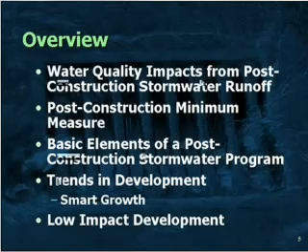Then we're going to move into two new areas. We'll talk about trends in development, the big picture, and Jeff Anderson will speak about EPA's smart growth initiatives. Then we'll connect that to another interesting topic: low impact development.

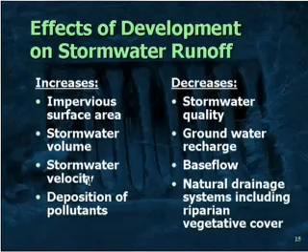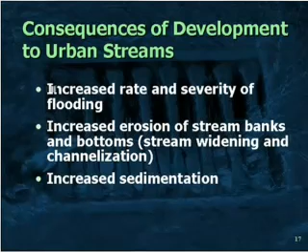Of course, we're seeing increases in flooding in particular areas, and we need to keep track of that. We're making changes in the hydrology—are we causing more expenses in trying to deal with flooding? Also, increased erosion of stream banks, channelization, and increased sedimentation.

And finally, of course, as we've mentioned, the chemical pollution issues, changes in biological populations—particularly the larger fish species such as trout and salmon are being affected. And all of these things are linked together.

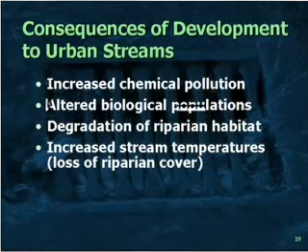Also of interest is temperature, as we change the physical characteristics of the areas around our streams and lakes. We're changing temperatures, and temperature can have a vast effect on the fish species and invertebrates in a particular stream. Actually, temperature is listed as a pollutant within the Clean Water Act as well, so eventually we may have specific requirements for temperature as a pollutant.

I think we've covered many of these things already, but these are the common pollutants we see in urban stormwater—obviously sediment and nutrients being the top two, and you can see a variety of other things. One acronym some of you may not know is the last one: polyaromatic hydrocarbons.

Typically in an urban area, these PAHs are coming off of parking lots. They dissolve in water, and particularly when a parking lot is resealed, we're finding heavy loads of these water-soluble pollutants coming off these parking lots, and they're very toxic to fish and other wildlife.

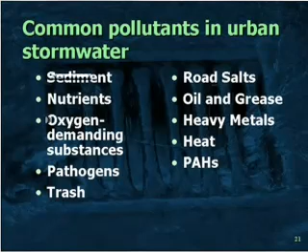There's an interesting new study out from the U.S. Geological Survey, which is noted on our website. So if you want to know more about this particular issue, there's quite a bit more to find out.

The next slide has some pictures. We're talking about sediment being dumped out, as noted on the left, when a stream hits a larger body of water. Algal blooms being caused by excess nutrients on the right, impacts from construction in the middle, and also cold weather events such as snowmelt.

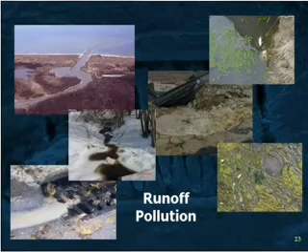Often people don't really think about that, but an awful lot of pollutants build up on the landscape during cold weather, and then when the snow melts and the spring rains come, you'll have particularly high concentrations of pollutants.

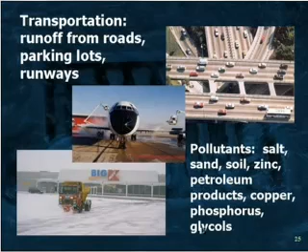Some common sources of pollutants out there come from a lot of our daily activities. Roads and parking lots contribute all sorts of pollutants. And also some of the choices we make as homeowners, such as fertilizing lawns, the herbicides we choose, or the insecticides we choose. All these millions of little choices that everyone makes every day are affecting the quality of stormwater.

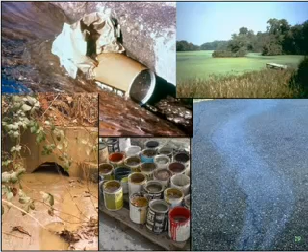Some more pictures here of common problems: trash and debris is a significant problem in many areas, as well as algal blooms, oil from parking lots leaking from cars, various toxic wastes, and of course sediment being the number one pollutant, believe it or not, in the United States.

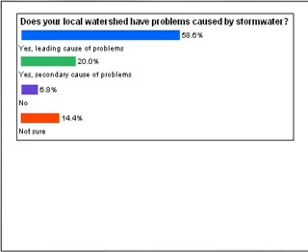So we have another one. If you said yes in the previous question, select as many as you want from this list. There are little check boxes this time, and you can select several. So maybe pick the two top issues that are in your watershed where you live, and then we'll show you those results as well. You can choose several, but so it doesn't get too confusing, let's just pick two.

All right, let's move on. I mentioned that as we develop land, we're increasingly changing the basic hydrology of watersheds, and those changes can be very significant.

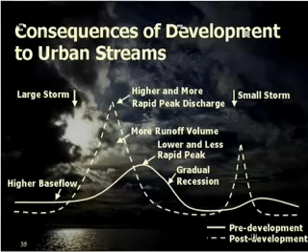So as we develop, the dotted line shows you - and this is just an artist's conception, not a scientific document by any means - the kinds of changes we're experiencing. Obviously the peaks are much higher. Also notice that when the storm starts, that peak flow happens a lot faster. There's a secondary peak that's significantly bigger. And again, note that base flow - because we're not allowing rainwater to infiltrate into the ground, we're lowering that base flow. That lowered base flow is causing our streams, particularly the smaller ones, to dry up during dry periods. It can also be affecting our groundwater resources as well.

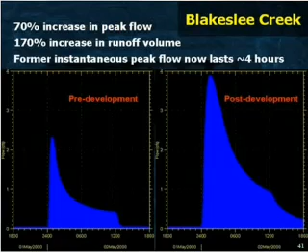Here's what was going on in an average rainstorm, pre-development and post-development. To make it quick, you can see that there's about a 70% increase in the peak flow - that is, the height of the peak is now 70% more. There's a 170% increase in overall runoff volume. And what was the former peak there, that level of water flowing through that stream, which was, for a very short period of time, a few minutes, now lasts for 4 hours in the new scenario. So those are some fairly significant changes there.

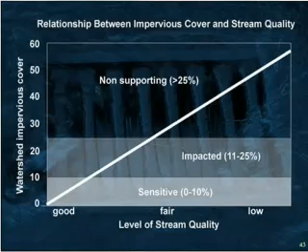The next slide is from the Center for Watershed Protection as well, and they've done a lot of studies in watersheds around the country. Basically what they have found through their research is that there's a strong correlation between the percent impervious surface and the quality of that watershed. As you can see on this graph, when impervious surfaces are limited to about 0 to 10% of the entire watershed, you're in that relatively good area. But as you move up beyond just 10%, the impacts start to occur. And when you get over 25%, you almost inevitably have a watershed that is not supporting its designated use and is being severely impacted by stormwater runoff.

A couple more examples also from the Center for Watershed Protection. Here's a stream where the watershed has 5% impervious cover. For those of you who've had a geomorphology class, you'll recognize this as a relatively healthy stream.

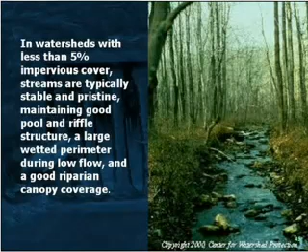The banks are stable. We've got that good pool and riffle structure as you move down the stream. There's good tree cover around, and the water quality looks good. There's not too much material moving through the bed of the stream.

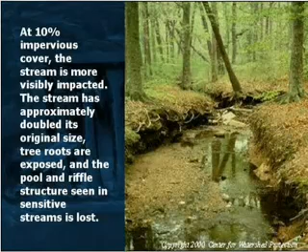Now we'll move up to the 10% level. Here you can see very clearly that the stream banks are now eroded. You can see the tree roots being undercut, and there's a lot more material in the bed of the stream. That nice pool and riffle structure is being disrupted because there's so much material moving through the bed.

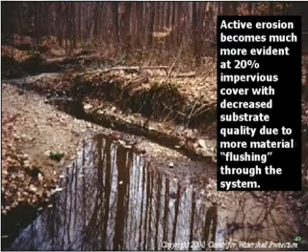One more example here, at the 20% level, you can clearly see what's going on. Some of that tree cover has been removed. You can see the down-cutting of the stream banks and the severe erosion problems there. I believe we have another slide also at 20%, where again there's just severe erosion problems.

Another interesting anecdote: a couple of scientists did studies on small watersheds to determine the source of TSS in their water. These were relatively urbanized areas, and they thought the sediment they were finding in the water column was coming from areas within the watershed, like parking lots, people's lawns, and construction sites.

They thought the vast majority was coming from those sorts of areas. But what they ended up finding by studying this carefully is that actually a lot of it was coming from the stream banks themselves, because during rain events there's so much water going through that the erosion is so high it's tearing away at the banks and suspending all that material. In one watershed they found 75% was coming from the stream banks, and in the other about 60%.

So it's a very interesting thing if you're trying to prevent a TSS problem. You really need to look carefully at where that might be coming from. The answer might be that a majority of it is due to volume, and not so much from other sources within the watershed.

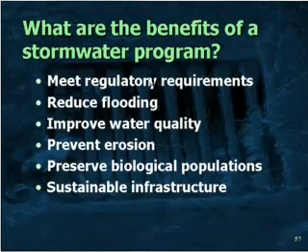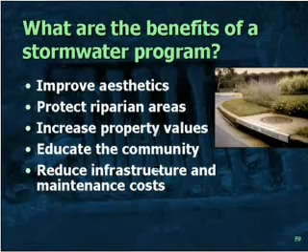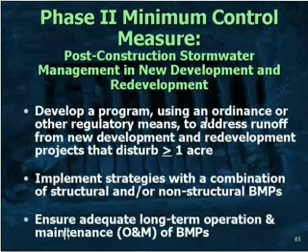And then, of course, we're going to be using structural BMPs and non-structural means as well, a combination of things that sit on the ground plus good housekeeping practices to make this happen. Another thing that's incredibly important to a post-construction program is having a very good operation and maintenance program, because these BMPs can fail very easily if they're not properly maintained, and we lose all the water quality benefits if we don't keep up that maintenance.

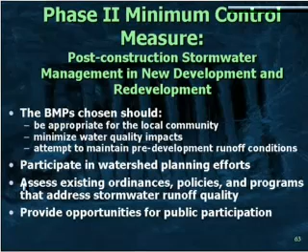Okay, so we have another pause here for questions, and let's just take two on this so we can stay on track. Ron, are there some more questions there? Oh, you better believe it. So we have an active audience out there. Is that right? We sure do. You wouldn't want to know what some of the things are.

Let's start with Pedro in Kansas, who wants to know, if temperature is a pollutant, what can we do to control it? Well, there's a couple things that can be done. Obviously minimizing impervious surfaces would be one, because as rainwater travels over surfaces, particularly blacktop, it's going to heat up quite a bit. So any effort we can make to minimize impervious surfaces will keep those temperatures down.

The other major thing we can do is make sure we have good riparian cover around our streams and rivers, and around our shorelines on lakes for that matter. But it's particularly sensitive for streams and rivers. Having good mature trees there that provide shade keeps those temperatures down. Trout and salmon in particular are very temperature sensitive, and when we change that temperature even by a few degrees, we can wipe out an entire trout population.

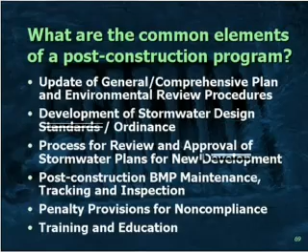It is a requirement, but probably not something you'll use all that often - some kind of penalty provisions to make sure that in case you have people that really don't want to do this, you have some leverage to make them do things. Most communities have found those are not used very frequently, since simply talking to property owners gets the compliance needed once they're properly educated. And finally, training and education for everyone from city employees to contractors and developers. So these are the major elements.

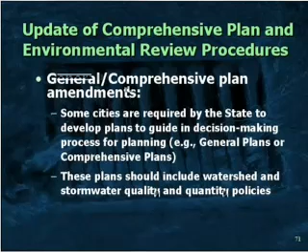Okay, let's talk a little more about this comprehensive plan. As I mentioned, most states have some requirement for a locality to develop a general or comprehensive plan. Getting watershed planning or the stormwater program integrated into that makes sense - it gives your program recognition at all levels of government and credibility, makes other people aware of what's going on, and gets them to incorporate stormwater considerations into their decisions, which matters when we talk later about smart growth and the planning and zoning area, where we need those folks on board as well.

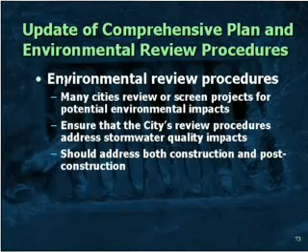We talked some about environmental review procedures. We sometimes artificially separate construction and post-construction as two separate programs, but in reality, on the ground these things are integrated together as aspects of the same review process. So when reviewing construction plans for a new development, you should have the developer include their post-construction plans at the same time, review them all at once, and make sure they all make sense together for the long term.

And lastly is the ordinance - the Phase 2 requirements do require the city to develop an ordinance, and you'll also need some kind of stormwater design standards. It could be that you choose to develop your own, or it could be that you reference a state manual that you find acceptable. We definitely recommend keeping your design standards out of your ordinance so it's easy to change and update those things.

You're going to need to describe the BMPs and sizing criteria that fit the conditions within your community. Sizing criteria particularly will vary by the amount of rainfall and rainfall patterns in a particular area, so you need to consider all of that. And of course, you want your ordinance to specifically say that developers must follow those design standards - that's your legal leverage to move forward.

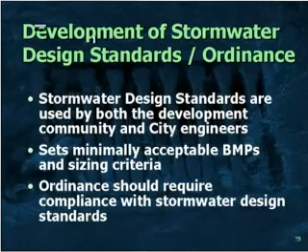Okay, so we have a little break here with a poll question. Let's find out if your city or county already has in place a stormwater ordinance that meets the basic descriptions we've just given you. You have a couple choices, just choose one, and we'll show you the results in a couple seconds. You don't necessarily have to know if it meets exactly, but if you think it covers some of those basic elements we've talked about, indicate that as a yes.

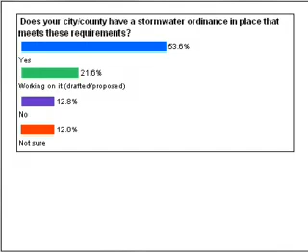All right, let's see what everybody has said here. Okay, I will show you this. Wow, this is quite different than any time I've asked this question in all the training sessions we've done over the last couple of years. I've never seen a response like this before. Most of the time, most people answer no. But here, some 54% are saying yes, and another 21 or 22% are saying they're working on it. Only 12% said no. Wow, that's astounding. Usually it's exactly the opposite. I guess the folks signing on to this webcast today are really in the vanguard, way ahead of everybody else, and the folks that come to our 2-day trainings, most people are laggards. Well, that's very interesting. All right, let's move on a little bit.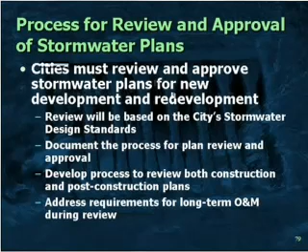You're going to want to look at both construction and post-construction probably at the same time. I think this is also a key time to look at the long-term operation and maintenance of those BMPs. You want to make sure it's clearly understood who's responsible, and we'll talk more about that in a minute. In fact, we'll talk about that right now. As I've said several times before, maintenance is really the key to the program.

Last year we were in Tennessee, and we had a case study speaker from one of the communities there. That community had made a choice a long time ago that homeowners were going to maintain many of the BMPs on site. So they did a survey. They spent a couple months and traveled around to every single stormwater BMP, large and small, within that community, and assessed each one as to how well it was being maintained. They found an enormous amount of complete failures, so many that they were really shocked at how badly things had gotten out of hand.

This leads me to my first key point: communities really need to make a very strategic decision about who is responsible for maintenance in the long term. There's a variety of choices or combinations of choices out there, with pros and cons to both sets of answers. If you take on all the maintenance yourself, that is the city or county does, you're going to have high expenditures for maintenance crews. However, on the plus side, you do gain control over that, and it's more predictable.

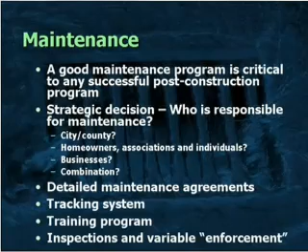I'm not going to talk about this for long, we've covered it already, but it gives you some basic ideas about that kind of escalating enforcement, in quotes.

Training and education - again we've talked about this some already, but it gives you some ideas about not only city staff, but depending on your setup, about educating developers when they put those things in the first place and how they're designing them, and then whoever is responsible for maintaining those in the long term.

Now we turn to another poll question for you. We're wondering if you know who's responsible for maintaining BMPs in your city or county. Do you think the city or county does almost all of it? Are homeowners associations responsible for the vast majority? Maybe a combination, or are you just not sure? Take a few seconds to click on one of those answers and hit the Submit Answer button, and we'll see the results.

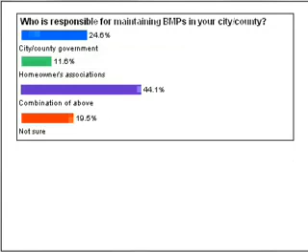I think this could be very interesting too, judging from the last one. Let's take a shot and see what this says. Okay, I think you can see the results there. Interesting, as we might expect, the combination approach is maybe the most common. Interestingly, about 20% don't know, and it looks like city-county government is also in there, about 25%. It may be in reality that it's more common for the city-county to have responsibility than indicated here, just in my experience. But again, if you think about all those maintenance issues, you can see the pluses and minuses to any of these scenarios and what that means for maintenance.

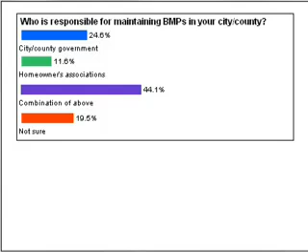Okay, I think we're going to pause for questions again. Ron, does anybody have anything to ask?

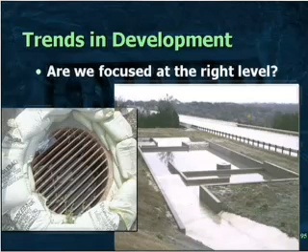This is an observation I've had for a while, that we in the stormwater community can sometimes focus a little bit too much at the micro level. We're often concerned about fixing problems or installing BMPs on a particular site. So, if you will, pardon this analogy, but our heads are a little bit down in this program.

The more I think about it, if we're not looking up a little bit, we may find in a couple of years that sprawl has happened all over the place, this sort of uncontrolled development, and we may never be able to catch up with stormwater by trying to fix all these problems. So what we're trying to do now is encourage you to look at the broad picture, to see what's going on within the watershed or within your community, and also to fix problems site by site. But I think we have to do the two together to really meet this water quality goal.

So with that, I guess I'll turn it over to Jeff a little bit, and maybe, Jeff, start with a question there. From your perspective, why do you see that the time is so ripe for talks about smart growth, and particularly how does that connect to water quality issues?

Well, thank you, Nikos. And before I answer that, let me offer my thanks for having me as part of the webcast. I'm really excited to be here, and I think this is a great audience to be talking with about smart growth. The conversations you and I have been having between our offices over the last couple of years, I think, need to happen more broadly between people working on development trends overall and people really focusing on the water issues.

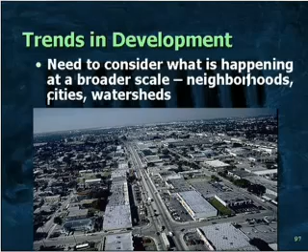And I'm going to try advancing the slide here, Nikos, but I may need to call on you. We'll see here. Oh, no? Good, okay. But let me step back for a second and just talk about what everyone knows, and that is that the current development patterns have had a very specific set of characteristics associated with them.

It's very low density. It tends to be very land consumptive. It transforms farmlands, forest lands, working lands.

Interestingly, in some ways it's a product of post-World War II planning, where on a map it looks really nice to have all my houses over here, my stores in a second place, my businesses in a third, my school in a fourth, and my shopping in a fifth. So we've kind of taken the elements of neighborhood and broken them up into separate pods, and then we drive around between them.

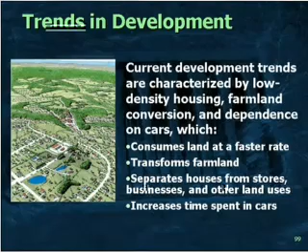That has real implications for how much we drive, and normally that's often considered an air concern, but everybody on this call most likely knows about the water deposition that eventually happens after that.

In a lot of places where I talk about this, the first question I get is, well, population is going to keep growing, we can't do anything about that. The thing that I don't think a lot of people realize, although increasingly they do, is that population is really being outstripped by development. So for a 1% increase in population in a metropolitan area, you might get 7 or 8%.

There are some places that have had, over the last 10 or 20 years, places like Detroit, places like Buffalo, have actually had no growth in population, or very limited amounts of growth, not only in the city but in the metropolitan area, and have still expanded by 25%. That has clear water implications, but frankly it's not only the water issues that are raising concerns and getting people to rethink those patterns of development.

You can see the trend of increasing land consumption just by what's sort of normal in development, and 80% of residential development tends to occur on the fringe of developed areas. So we're not so good traditionally at reusing land we've used before. And when we use new land, it tends to be on larger lots. So it's a very land consumptive pattern of development.

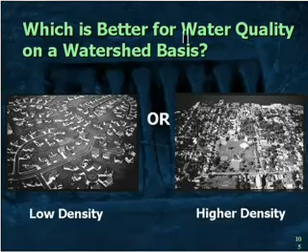I think that is the result of a couple of things. One is I think we've actually done a decent job of getting part of the story out from the Center for Watershed Protection about imperviousness and about limiting imperviousness at the site level. The other is that I think we are accustomed to thinking about our developments on a site-by-site or permit-by-permit basis. Let me just show you what I'm talking about here.

I've got three scenarios here: one at 1 unit per acre of development, one at 4 units, and one at 8 units. And if you take what I think everyone on the phone would agree is sort of an improper application of the Center for Watershed Protection's paper, you'd say, well, at the site level here, this 1 unit covers 20% of the lot, and the 8 units cover 65% of the lot. So the 8 units are not good.

Let me just pause for a moment and digress and say the example I'm going to run through here is intentionally overly simplistic. So I just want to beg your forbearance because it's not meant to be subtle. It's meant to make the overall point, and then to try to work our way back from the point to a more subtle application of these ideas.

When you look at the individual site level and you do the analysis, you say, well, 8 is worse than 1. You can see that 1 unit per acre creates 20% imperviousness, and you can calculate the runoff from that from given storm events in a year, and you get 18,700 cubic feet of runoff. For the 8 units per acre, for instance, you get 39,600 cubic feet of runoff. So 39,000 is worse than 18,000.

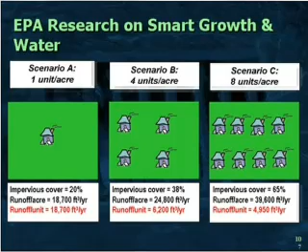It's really more a question of where is 25,000 houses going to go? Because that amount of growth is coming somewhere here. So how do we accommodate that in the best way? That actually requires a different kind of analysis when you start to look at it.

When you ask how do we, in the example in these slides, accommodate 8 housing units in the least impactful way, you start to do a different analysis. You say, okay, we could accommodate the 8 units at one unit per acre, and that would use up 8 acres. We could calculate the total runoff from that, and it's 149,000 cubic feet per year. Compare that to the higher density scenario, and you get total runoff of 39,000 cubic feet per year.

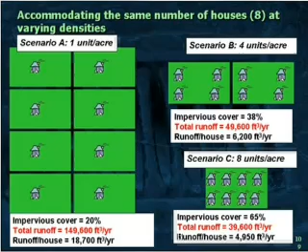That tells a very different story, and would lead you to a different set of answers in terms of the best way in this scenario to protect water resources. Everyone will recognize this as a potential application of clustering. We're all very familiar with that concept at the site level, but we can take it to the watershed level, which is really where smart growth is trying to engage these issues, at a broader level.

You can see here the difference in accommodating 10,000 units of housing at 1 unit per acre on the left-hand side in scenario A, versus 10,000 units at 8 units per acre. Using the Center for Watershed Protection's paper correctly, we see that the higher density scenario has clustered the development at a big scale and ends up somewhere in the neighborhood of 8% impervious cover.

If you're smart about where you locate that density and don't let it go into fragile or ecologically important areas, you can really get some good performance from that. In contrast, the lower density scenario gets you about 20% impervious cover. We know from CWP's paper and other research that 20% is going to lead to some rather important impacts within the watershed we're trying to protect.

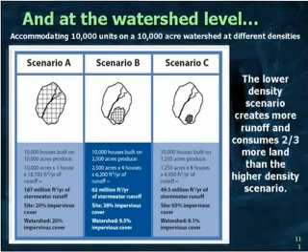The question, of course, becomes what happens to the development after that. We've got another slide that tries to take a look at that. You can see that by accommodating the development in a more dense pattern in scenario C, for the next 10,000 units that come, you still have a good chunk of the original watershed left. For scenario A, you've actually consumed a whole second watershed.

The differences there are similar to what you saw in the previous slide: now you have 2 watersheds at 20% imperviousness and one at basically 16 or 17%. That, of course, isn't to say that if you were to ask me, because you could take this example and keep building it out, do I want 10 watersheds entirely built out or one built out at a much higher density?

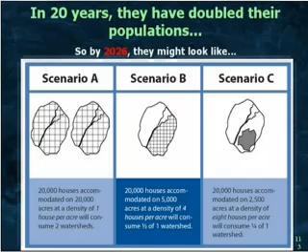Obviously, and this is where we have to apply a little more subtlety, you want neither. You want to concentrate the development strategically in different watersheds so you can meet the carrying capacity. This example is really meant to counteract the assumption I think is out there among a lot of local officials that lower density is the way to go, when in fact what we're seeing is that lower density is driving a lot of the land consumption that's leading to the degradation in our rivers, lakes, and estuaries that you started with, Nikos.

So when we're thinking about density, that's only one small piece of smart growth. Density by itself does not work well. It needs a range of other principles and other techniques applied at the same time to make it work well.

So density, where you have a lot of houses in one place but still have to drive a long way to get to the office, to school, to do any of the things you'd like to do in a neighborhood, doesn't help you with transportation, doesn't help with air emissions. So you need to mix land uses, create a range of housing opportunities and choices, create walkable communities, and preserve critical open space, whether you're going with high or low density development.

One of the questions I get a lot is, well, the way that high density can help protect a watershed is if you guarantee that you're going to get land conservation where the development didn't go.

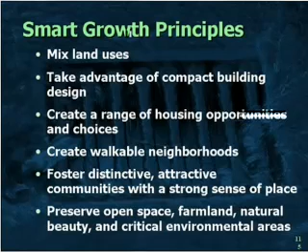And that's absolutely important, we have to get that land conservation. But I would submit also that it's perhaps more important to get the land conservation with the lower density development, because that's the development that is chewing up the land at an incredibly rapid rate. So those are some of the principles that go into making neighborhoods work. They've been extracted from the local level, looking at where communities have engaged these issues and tried to find solutions. So this is really an effort to copy success, and you come up with very similar principles around the country when you look at places that have addressed these issues.

This is the second set of the 10. There are 10 principles that the Smart Growth Network has come up with, a network of 36 organizations who didn't come up with this in isolation, but looked at what was creating success on the ground and tried to enunciate those principles so other people would be aware of how communities were moving forward with this. So the implications are several when you think about water quality, smart growth, and protecting water resources.

These are a couple that I think are really important. I showed examples of 1 unit per acre versus 8 units per acre, and you could see a pretty steady increase in imperviousness between those. But if I were to show you the difference between 8 units per acre and 80 units per acre, you actually don't get a huge increase. You may between the 8 and 16 units per acre, but after 16 units per acre or so, you don't get a huge increase in imperviousness. In some sense, that's free land, and free growth that you've accommodated without adding any imperviousness.

Other excellent examples of that are, again, here in the Washington region, we've had an incredible amount of redevelopment that all took place on previously developed sites - in a sense, free imperviousness that we simply reuse.

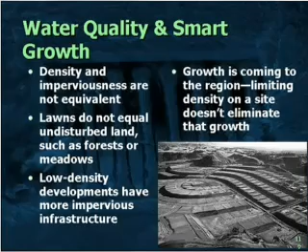We didn't really talk about the imperviousness that is dictated by particular development forms that aren't on site. So if you have low density development at 1 or 2 units per acre, you have to understand that sends a clear signal to the traffic engineers that you're going to need a lot of roads and wide roads, and to the retailers that the places their customers will agglomerate in a way they could efficiently serve them is going to be strip arterial development with large parking lots. So we need to think about the whole picture rather than just individual sites.

So when we think about which is better - and this makes the point from the previous slide - the housing on the left there is invariably served by the retail on the right. So when we think about whether this is a fabulous conservation design, we really need to think about whether it leads to fabulous conservation retail as well, and fabulous traffic conservation techniques as well.

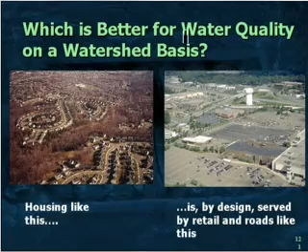But when we think about smart growth, my point in presenting this is certainly not that high density is always the answer. It's not - you really have to look at the individual situation and preserve the critical green space. But I think the default assumption out there right now tends to be that lower density works better as the de facto answer for protecting water, and in many cases that's not helping and may even be hurting us.

So I just want to leave you with that, and give you a couple of resources that we've been putting together that spell out some of these ideas in greater detail. You can find them at epa.gov/smartgrowth. I would also refer you to smartgrowth.org, a website that the EPA supports.

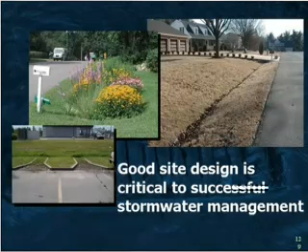When we talk about site design, these are decisions that we're going to be living with for maybe as many as 100 years. So we really need to think carefully about what we're doing and design our municipal programs in a way that we can accommodate the kind of growth that we are inevitably going to have. The population of the United States continues to grow and is projected to continue for quite some time. So we are going to have growth, no argument about that. But how can we deal with that in the best possible way? Jeff touched on some ideas about how to do that at the watershed scale or the broader scale. Now low-impact development, a philosophy that's been around for quite a while, focuses a bit more on site-by-site kinds of distinctions. So let's get into that.

First of all, I think it's fair to say that some of the traditional stormwater management ideas we've had over the past 30 years have often exacerbated the problem. It seems almost as though we had this underlying thought that maybe we were all allergic to stormwater, and we had better get rid of it, get it away from us as fast as we can. So we built a lot of conveyance systems essentially designed to move that water away. In that process, we created, or certainly contributed to, many of those problems we were talking about before, like blowing out small streams with intense velocities and volumes of water, and the degradation of habitat and all that kind of stuff.

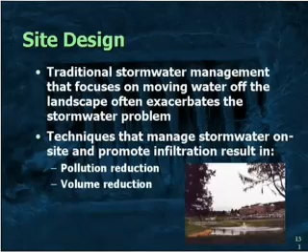What we're finding now is that if we can change that dynamic or paradigm a bit more and talk about treating stormwater right at the source, right where it falls, so that we're not gathering it up but micromanaging it. This may be the only time you'll ever hear that micromanagement is a good thing, but here we go, micromanagement is a good thing. So we're after both reducing the pollution, the chemistry content, or perhaps eliminating it, as well as the volume. Those are the two principles there.

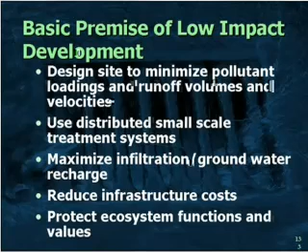So we're using small-scale systems. We don't want that water to get very far away from where it fell before we deal with it. The key here is infiltration. We want to maximize our infiltration potential as much as we can, both so we get groundwater recharge, which is becoming a critical issue in many parts of the country, particularly in more arid areas, but really anywhere people are relying on groundwater as a drinking water supply, we're finding those groundwater levels are going down. And also, as I mentioned before, just the base flow to our rivers and streams. You'll also see that some of these techniques really reduce infrastructure costs, both capital costs and long-term maintenance costs. We're trying to restore those ecological functions, the hydrologic integrity of our watersheds.

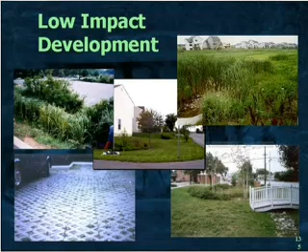So here are a couple pictures of the kinds of techniques we're going to cover. Interestingly enough, we mentioned before that these have aesthetic value, and I think you'll see some nice pictures coming up that will impress you with how they look as well. So these things definitely don't have to be ugly eyesores on the landscape. They can be designed in ways that are very appealing.

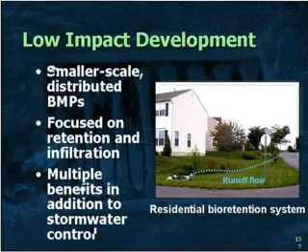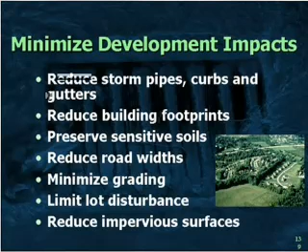So again, our focus here is small-scale systems and infiltration, and we'll be talking about many of the benefits that go along with that. One of the things we want to try to do is reduce some of the infrastructure, the big stormwater pipes, curbs and gutters, those things that gather up stormwater and channel it. We want to reduce building footprints and maximize the amount of permeable area around the buildings that we do have. We want to be careful about sensitive soils that might erode easily, which we often don't think about. Jeff talked about reducing road widths and parking lot sizes, or changing parking lot design so they aren't quite so big, or perhaps even choosing not to build them at all. Our overall goal is to reduce impervious surfaces.

What we're trying to do is basically maintain the natural hydrology of a site, or keep that as constant as we possibly can. There's a number of techniques we can use to do that, and we'll talk about those in the slides coming up. Ideas like open drainage, not channeling things through pipes, reducing certain slopes in certain areas so we don't pick up speed or velocity as water moves along, and lengthening the time water can stay in a particular area.

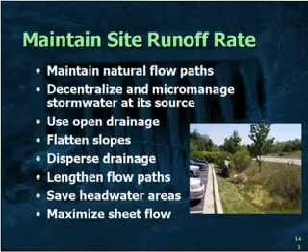We want to maximize infiltration and preserve certain very critical areas, particularly headwater areas, those riparian zones around the small first-order streams. And maximizing sheet flow—for those that don't know, I mean not concentrating stormwater. Stormwater flows over a surface, starting out as sheet flow, like on a parking lot, but as soon as it hits something, it starts to concentrate. We want to avoid that as much as possible, because that's where we have more difficulty managing it once it's concentrated.

So we have all these alternatives, and probably one of the biggest things we want to try to do is the curb and gutter thing. I have to put in my little spiel about parking lots—you noticed a guidance document about them in Jeff's resource slide. It's kind of a surprising thing, but I could pretty much say that almost every single parking lot in the United States is designed incorrectly. It's not as though this were something new we just learned yesterday—these ideas have been around for a long time, but somehow we keep repeating the same bad patterns over and over again.

First of all, we have parking lots that serve, in many areas, just one particular store—we're seeing that a lot with big box retailers. Each store has to have its own parking lot, so you get stores farther and farther apart, and all these parking lots empty all the time. If you drive by, you'll see many 90% empty spaces, but these lots are designed for the day after Thanksgiving. If we keep designing that way, we're having a lot of impervious surface that really serves no purpose. So at the highest level, we need to look at that.

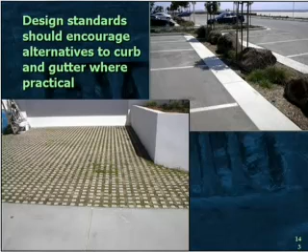So in the picture you see here, the ground level is actually lower than the level of the surface, so water coming off the parking lot is channeled into that area and allowed the possibility of infiltrating. The other picture shows pervious pavement, pavers—there's different varieties of that, we'll talk about that in a minute. That's certainly another option, particularly for outlying areas you might only use on a busy Saturday, that get lighter use. You might consider those sorts of things.

So there are a number of low-impact development techniques, and you'll find many, many varieties within these, but these are some of the major groupings. We'll talk about each one of those as we go along real quickly, and I'll show you some pictures.

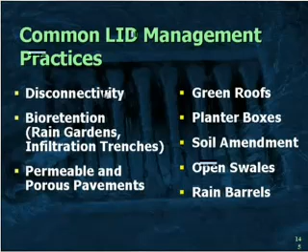The first one is disconnectivity. This basically means disconnecting some of these downspouts, and it's amazing how much water can infiltrate in a particular area. This option is extremely low cost. All you need is a hacksaw. Doesn't cost very much - go out there and chop that thing right off, and boom, you've achieved your goal.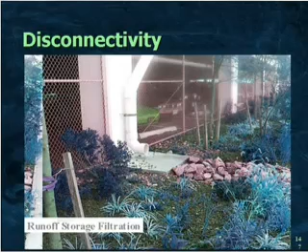Now, one of the arguments some people raise is, oh, I have poor soils, poor draining soils, I can't do this at all. That's not exactly true. Depending on the soil type, the amount of rainfall, and the kinds of patterns you have, you may be able to do more or less of this, but you can always do some. I'll show you in a couple minutes some different ways these BMPs can be designed for different conditions to maximize that value.

Now, let's say you're living in an area with poor soils, and you say, well, I can't do that. You might want to look at a rainfall pattern for a year for your particular area. In our area, something like 80% of rainfall events are less than half an inch - those are relatively small, so only a few are the bigger ones. So we could design these swales to infiltrate that half inch, and we've got 80% of the rain during the year infiltrated.

Now, in those times where it goes over that, maybe we have some kind of check dam or spillway, and for those really big events, some of that volume is transported away in a more traditional way. But these things can be designed for and thought about. The simple elements to that calculation are your rainfall patterns and the kinds of soils you're dealing with. Even with an unamended soil, pretty dense clay, you can still infiltrate quite a bit. So these are things that can be figured out.

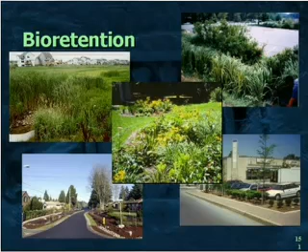They often do these in different layers. You can really vastly increase the holding capacity of that particular area. These things also can be designed, and are often designed, with overflow features so that when you have those enormous events, the part that cannot be infiltrated will be carried away in a more traditional manner. But you still can infiltrate a great deal by using these simple devices.

Here's another picture coming up about parking lots. I already did my spiel on parking lots and how badly they're designed. So this is something where it's really time for a major change in the way we're doing business. And I think a lot of that, as Jeff alluded to, starts with local codes. Often local codes are the ones prescribing not only the size of them, but the designs and the use of curbs and that sort of stuff.

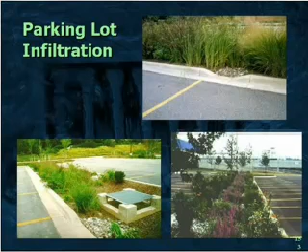We saw some pictures - the picture on the bottom right is of a designed parking lot, but the top picture is a retrofit, simply a curb cut to allow that water to get past the curb and into the area, which magically has been lowered a little bit, so the water will actually run, as it likes to do, going downhill, not uphill.

They're often populated with wildflowers and native plants. Many communities have found a good way to get started is to work with a local garden club to get them to start doing it, the people who are most interested in this sort of stuff.

And then, lo and behold, without any advertising or marketing or requirements, their neighbors will say, well, what is that you're doing over there? Why have you put this little depression in the front yard, and why are you planting it that way? Why did you direct your downspouts over in that direction? The idea can spread from the people most interested to the next group of people.

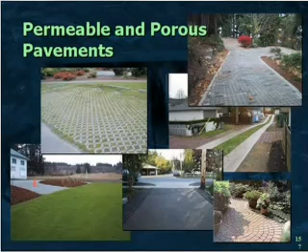Very shortly we're going to be publishing a new fact sheet on permeable concrete, and that'll be up on our website in about 2 months. So you'll see that very shortly.

Green roofs are another area that is starting to catch on, very popular in Europe but not as well known in the United States. They're seen as kind of an exotic thing by many people. But there's also some interesting literature on this, and this is another area that we'll have a new fact sheet up on our website in about 2 months.

Some of the benefits of this are very interesting. The costs for installing a green roof are obviously a little bit higher than a traditional roof. But one of the interesting facts is that these green roofs last considerably longer than any other roof material, simply because the roof material itself is not exposed to UV light, which causes degradation of most roof materials. They also provide insulation benefits in ultra-urban areas.

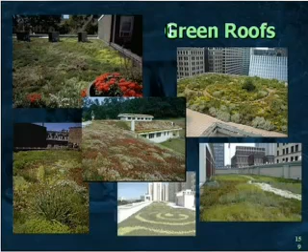They provide relief from the heat island effect, and can also be an aesthetic improvement to a building with a little walkway and benches and things like that. The city of Chicago now has a requirement that all new municipal buildings have a green roof, and they have voluntary programs in place for commercial buildings. We have several in Washington, D.C. In fact, the Department of Interior is installing a green roof on the Interior headquarters here in Washington, D.C.

The next one is rain barrels, and this is something that's often talked about as a community involvement project. There are many examples of communities sponsoring rain barrel events and getting people involved. Up to this time, I've always said, well, that's a great thing to do, to get people involved, to educate them about stormwater, but it's not going to really provide any benefits at all.

I've been proven wrong recently by some of the folks sitting here with me being very quiet. There was actually a very detailed water quality model put together for a particular neighborhood where they evaluated about 10 different low-impact development BMPs on different sites within a several-block area, going through thousands of scenarios to evaluate effectiveness and cost. They found that rain barrels actually can provide some benefit at relatively low cost. A solution's never going to be all rain barrels, but they can help, particularly in an ultra-urban area where you don't have many other options because of size constraints.

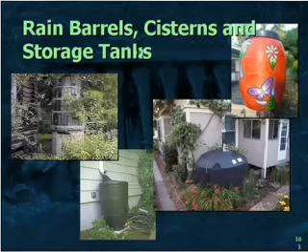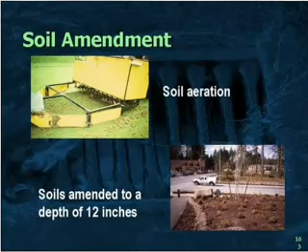The last area we're going to talk about is simple soil amendments. As Jeff mentioned, grass is not the equivalent of trees, and areas like municipal ball fields and playgrounds become more compacted over time, acting more like impervious surfaces. Simple soil amendments, just digging it up, stirring it up, perhaps adding humus, can vastly increase infiltration capacity. It's a low-tech, low-expense option communities may want to consider in high-traffic areas.

And the last one, planter boxes. Again, for those ultra-urban areas, they're probably not going to buy you a whole lot of stormwater reduction, but it's a good way to educate people about stormwater and get them to do something. So it may also provide an education opportunity you can take credit for.

So here's a poll question: are any low-impact development BMPs used or encouraged in your community? Let's use as a threshold that you've actually seen some out there on the landscape, not just theoretical. So the choices are: yes, they're out on the landscape; our government is working on it; or no, we're not sure. Let's see what people say.

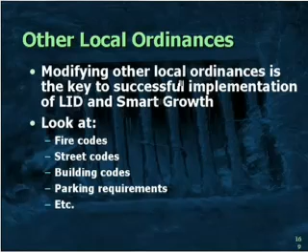Jeff talked about this already, but looking at other ordinances in your community is particularly important—not just the stormwater ordinance, but others that might be impacting you. Fire codes are a big one because they often dictate street widths, and you may need to do an education campaign with your fire chief to show that you don't need 3 hook and ladders down the same street simultaneously. There are all kinds of things out there—codes describing how streets are built, that curb and gutter issue we've talked about, parking requirements, etc. Those are some areas to look at. The Center for Watershed Protection actually has a very good document on how to evaluate your codes, and the center's website will be up at the end.

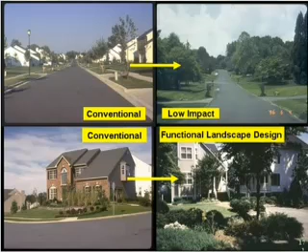So we mentioned before that some of these low-impact development techniques can actually enhance property values. If you look at the slides here, the left side is more conventional, the right side is a low-impact kind of design. You can instantly see—and yes, we selected these pictures to make our point—that the right side is more attractive than the left side, right?

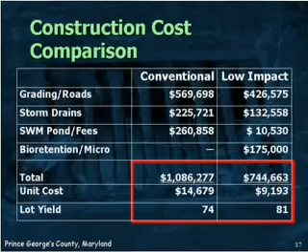Let's look at a study from Prince George's County in Maryland where they did a cost study, which is quite revealing. To make this quick, you can come back to the details at your leisure. Comparing the same site with two different designs, one conventional and one low-impact, total costs were reduced primarily due to less infrastructure, cutting costs associated with curb, gutter, and pipe. Unit costs were reduced, and lot yield actually increased, primarily because they didn't need an enormous wet pond taking up acreage. So there are definite benefits for developers choosing these techniques, and that's something worth pointing out in your education work, since everything is about convincing people.

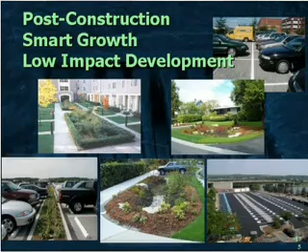In conclusion, I want you to come away with the message that the post-construction program is perhaps the key element behind the long-term success of the stormwater program. I hope between Jeff's talk and my talk on low-impact development you can see these two things can work together. We don't just need high density or low density, but good planning at the watershed level and good installation on each site. We need to figure out ways to make these two ideas work together.

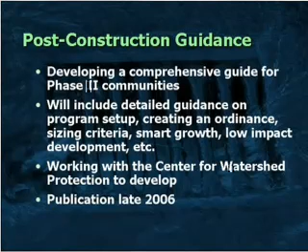As I mentioned before, we will have a comprehensive post-construction guidance document covering everything from soup to nuts that a community might need to know. We're hoping to have that in late 2006. It'll cover everything from ordinances to the kinds of BMPs to the smart growth ideas that Jeff was talking about, et cetera.